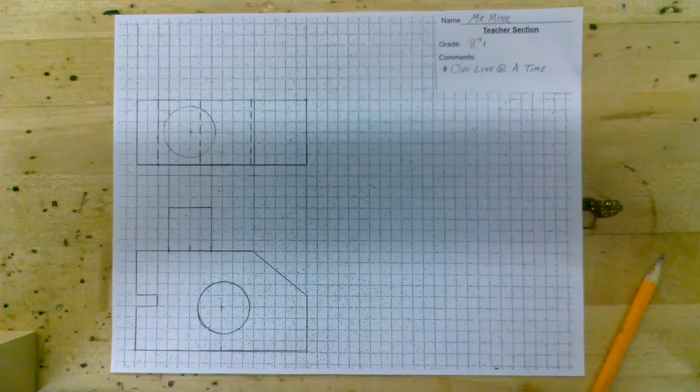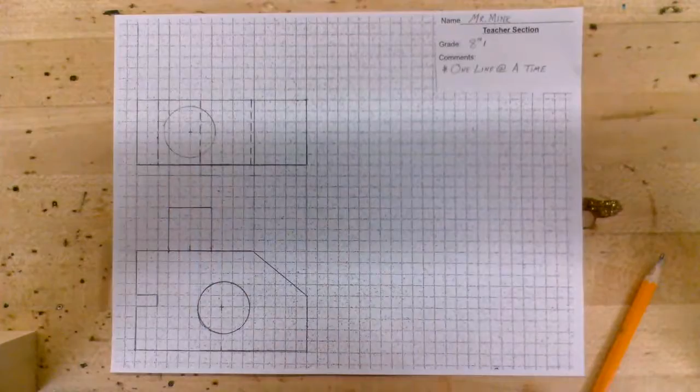It's now time for the right side view. Just to show you with a little bit of review here: when we did the front view and the top view, we're only showing what you can see with solid lines and what you can't see with dashed lines, which are called hidden lines. So what can you see in the front view? You can see the hole, you can see the cylinder, and this cut.

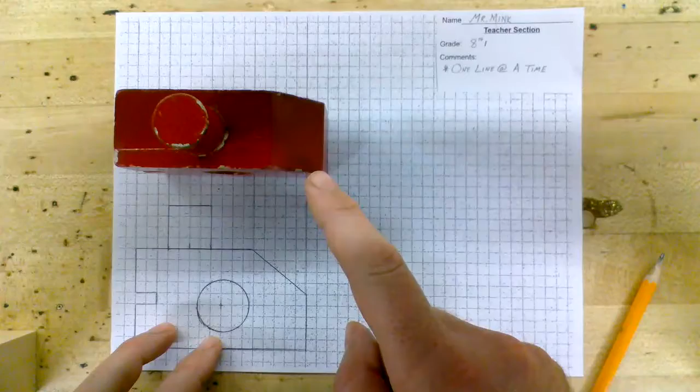When you go to the top view, you see that the block changes direction here. That's the end of the block, and that's the other end of the block. But you still have to show that there is a cutout on the side and the hole going through the block. And how we show that is through those hidden lines.

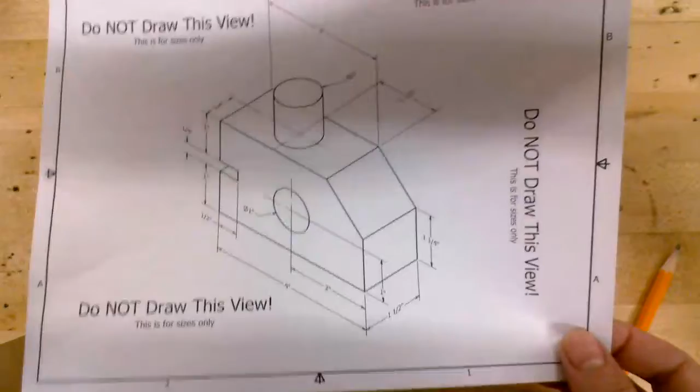All right, so now we have the right side view, which we have the front here, the top. So now the right side view would be us looking at this side of the object. Going back to where I can get my dimensions. I know that I have a 1.5 inch wide block. I know that it is 1 plus 1 plus 1/4 inch, 2 1/4 inches tall. And I can get a lot of other information from projecting my lines.

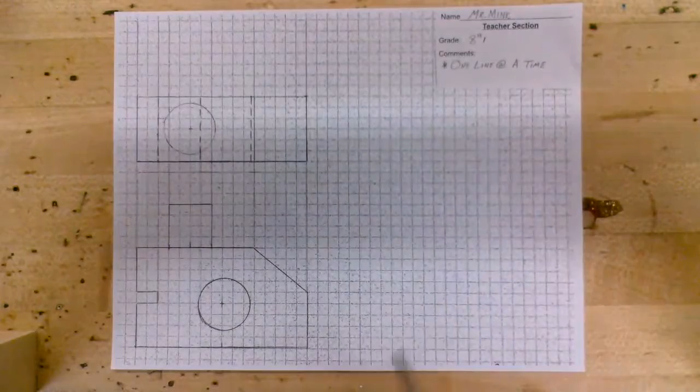So I'm going to project the lines from the front view. I need that 4 block gap. I know it's going to start there. Project my lines over. Every horizontal line is going to get projected over. Remember, keep them nice and light and you'll never have to erase them.

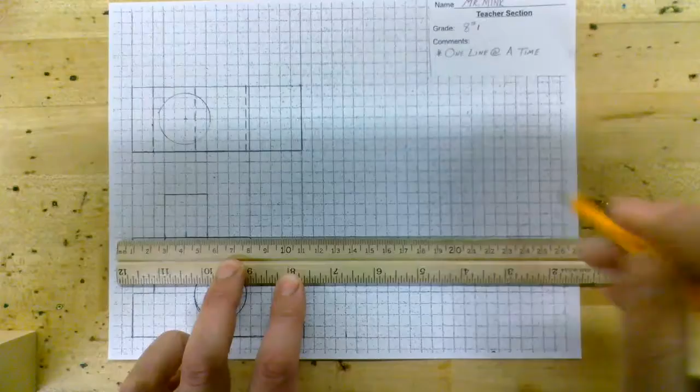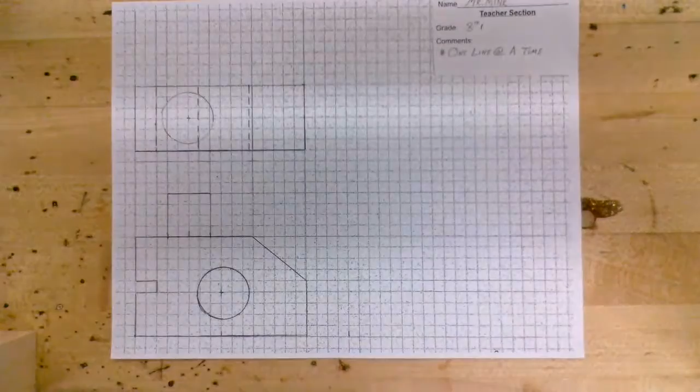I will have to project the hole over again, but I'm going to wait on that so I don't get confused with the extra lines. Okay. I can quickly look at the sheet that's posted to make sure that the actual measurements and lines are going to line up where I need them.

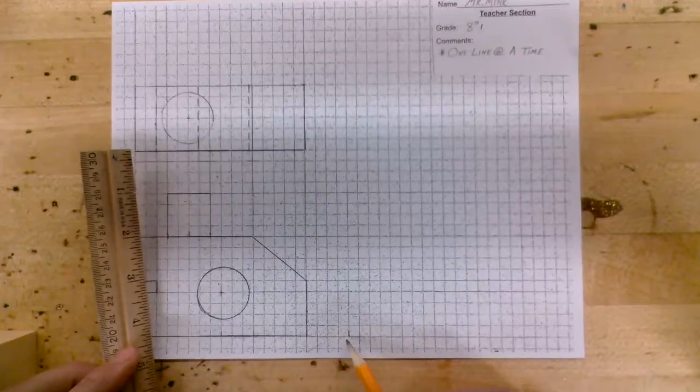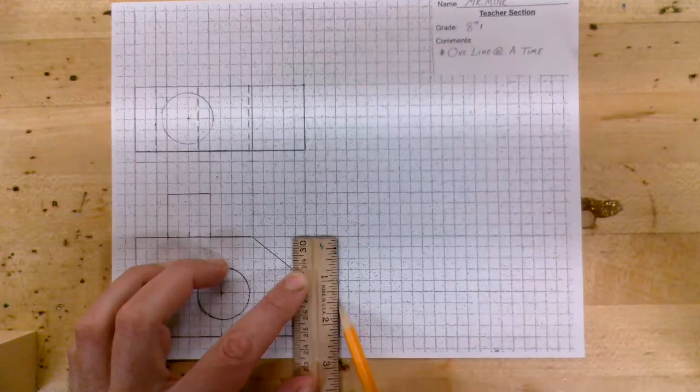I started that inch over. I know that my block without the cylinder on top, because the cylinder doesn't go the full width of the block, is 2 1/4 inches from adding up these 3 dimensions over here. So I can come down here, line it up at 2 1/4, and I have my projection lines there, so I know that that is the right height. And again, I messed up and only went 3 blocks, and I should have gone 4. So I made that dark. I'm just gonna do a nice light erase there.

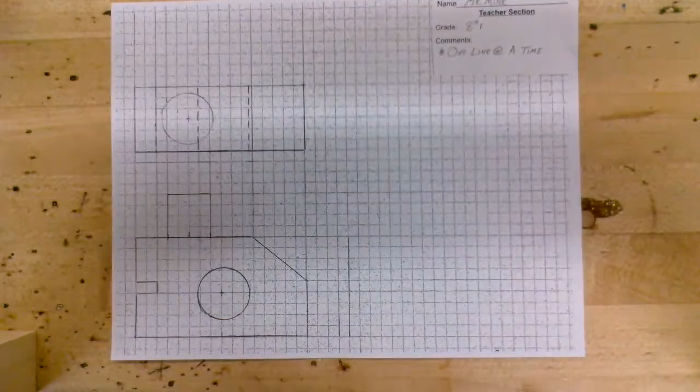Just wait, Mr. Travis does it better than I do, so when you see his tutorials, they'll be much better.

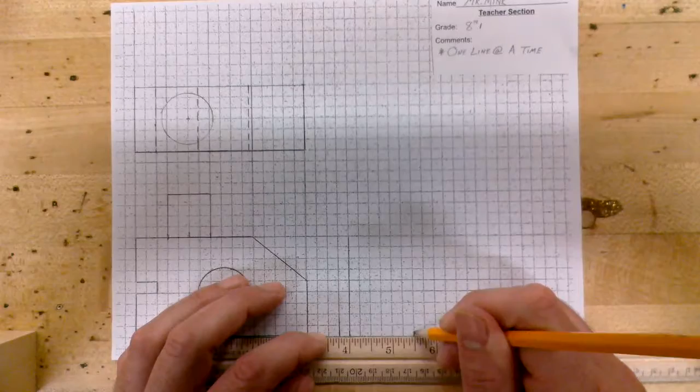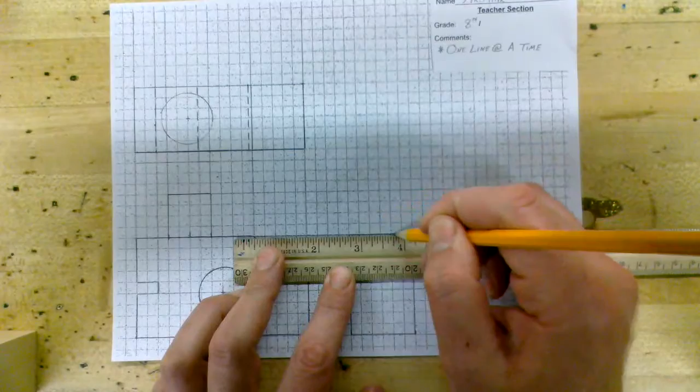The width of that block, 1.5 inches from this corner to that corner. If you only have a straight edge and you don't have a ruler, you can just count the blocks. 1.5 inches, and I know that that goes up 2 1/4 as well. There we go. I'm going to darken the lines before I deal with the hole from the front view and the extrusion on top.

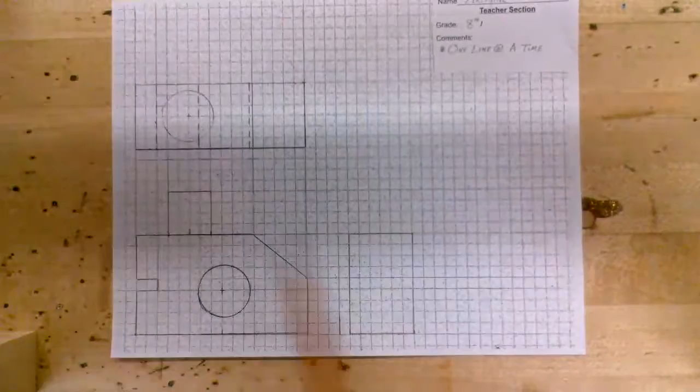If I look back at my drawing, I will see this horizontal line, but the other ones are going to be hidden because you cannot see that cutout from the right side view. We know the cutout is there, so we have to show it, but you cannot see it from this view. I look over at where that is, line it up. And my hidden line is a dashed line. I'm going to do the same thing here.

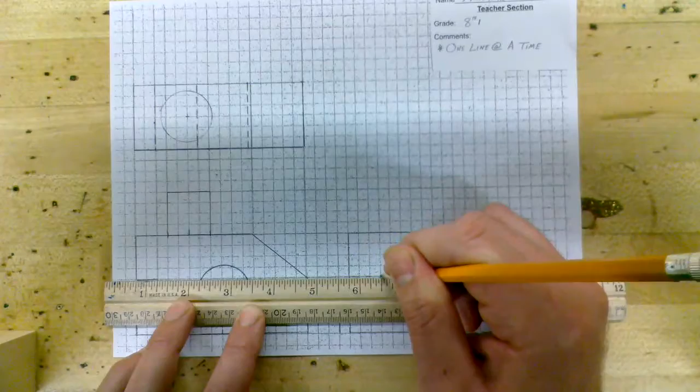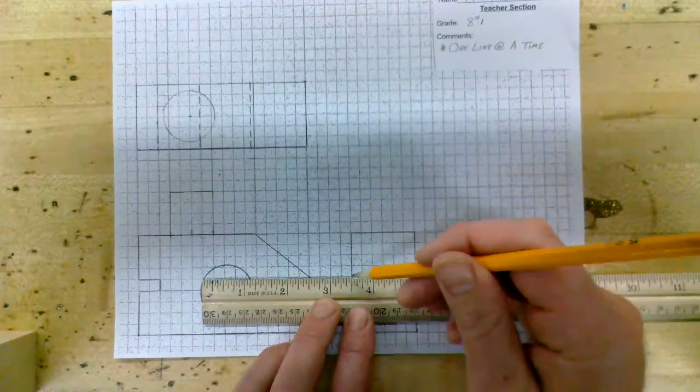Now, what you might realize is that where the block comes down, this turn right here, that is going to be a solid line. So that actually covers the hidden line up. So you will not see the hidden line. I'm going to darken that in so you can see it here. This line that's above it was the hidden line that is actually turning into a solid object line.

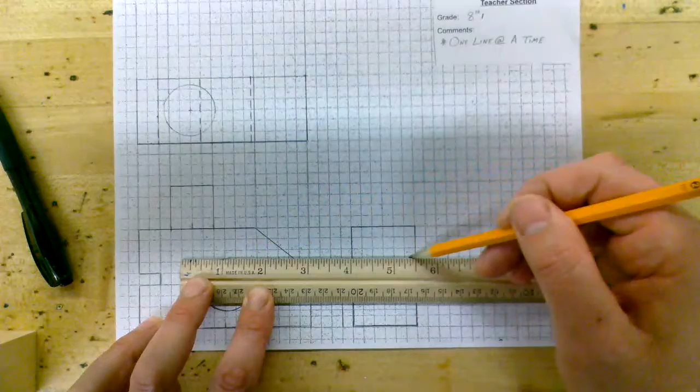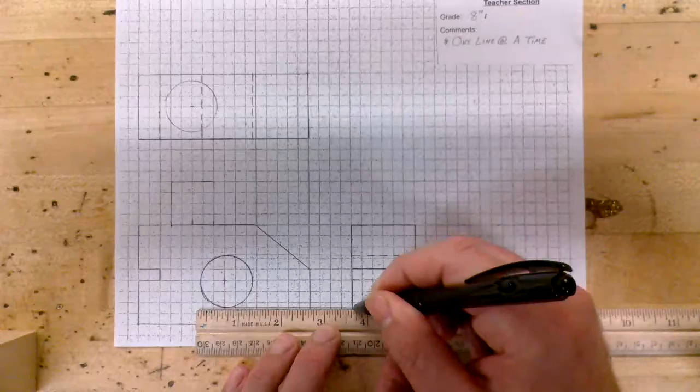Now that you can see those lines better, we'll bring the lines from the hole over. And those will definitely be a hidden line because you cannot see it from the right side view. Line up my straight edge with the end, projection line, projection line, and then that turns into a hidden line once it gets to my view. So it does not need to be dashed until you place the line into the view. Everything else is a nice light projection line.

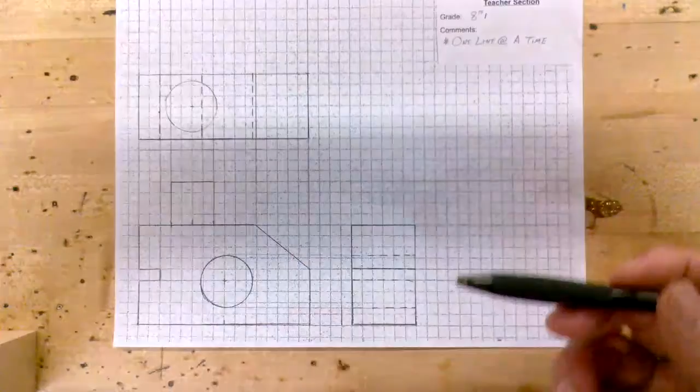I have all the information from inside of the block. We're going to now add the extrusion to the top. As you can tell, the extrusion is not the width of the entire block. It is 1 inch in size. And if you look at a circle from the side, or a cylinder from the side, it is actually a rectangle. You cannot tell that it has curved edges.

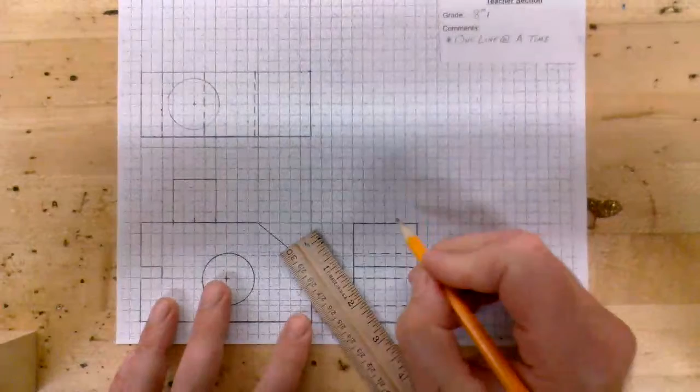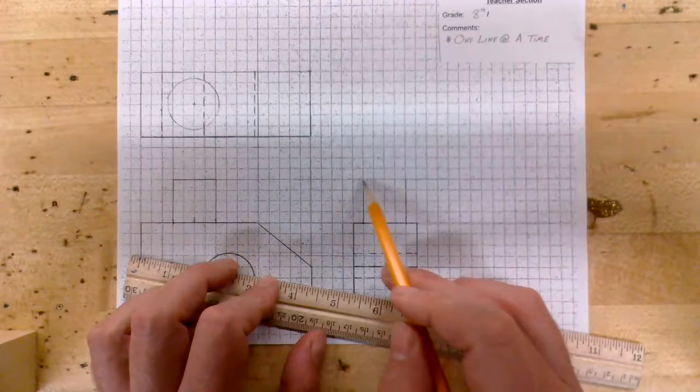So we are simply going to go from the center point. Let me get back to my pencil here. From the center point, I know it's a 1 inch diameter, so it comes a 1/2 inch over and a 1/2 inch over. 1 inch is the whole cylinder. The height of the cylinder I know is also 1 inch. And then I'm going to connect those lines, which is already connected with the projection from the front view. So the last step in creating my right side view is making these object lines.